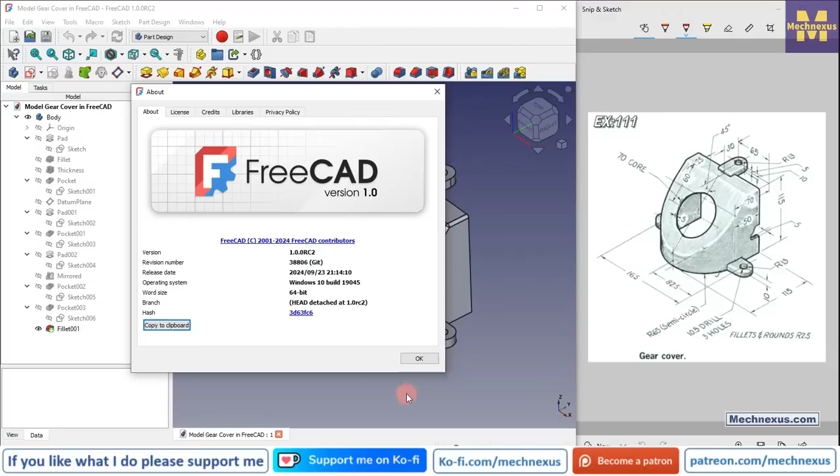I will close this file and create a new file. So here I have created a new file. First thing I will do is insert body, and I will turn on my origin plane, and we will read our drawing. If you see our drawing, we will create our first sketch on the right plane.

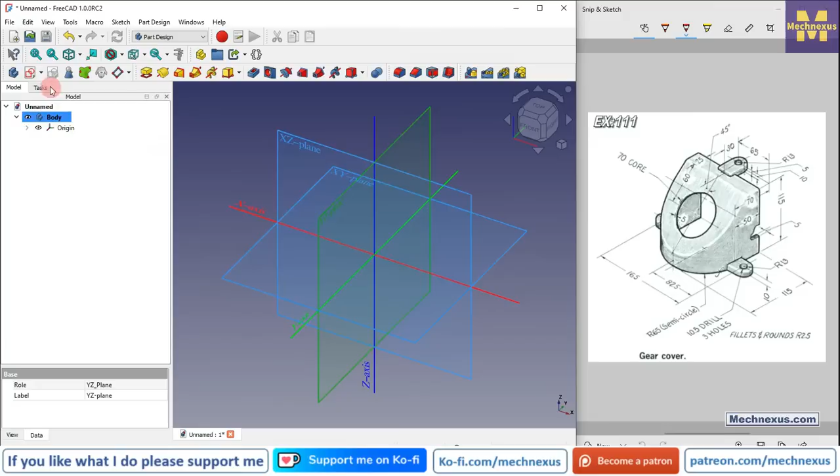So we will select this YZ plane and click on sketch, and we will go to the model tab and turn off the origin plane. Now we will select the polyline tool. Click on the polyline, and we will create a rough profile.

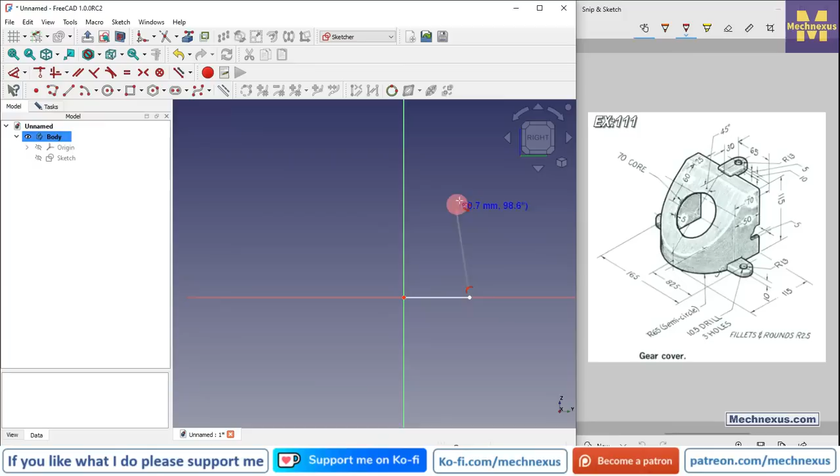So this is the rough profile. Let me move my icons so that I can get more space.

Now this is 115, so I will select this line, and in FreeCAD 1.0 all dimensions are combined in one. So here I want horizontal dimension, so I will give the horizontal dimension 115, and vertical dimension is also 115. You can directly click here so that FreeCAD automatically detects whether it is a vertical or horizontal dimension. So give it 115.

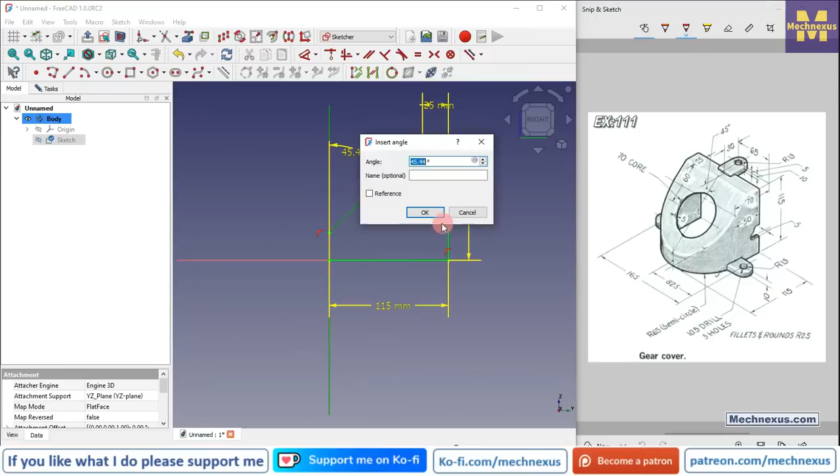And this one is of 25, and we will give this angle which is of 45.

Now here you can see that our sketch is fully constrained, so we will come out of the sketch, go to the task and close it.

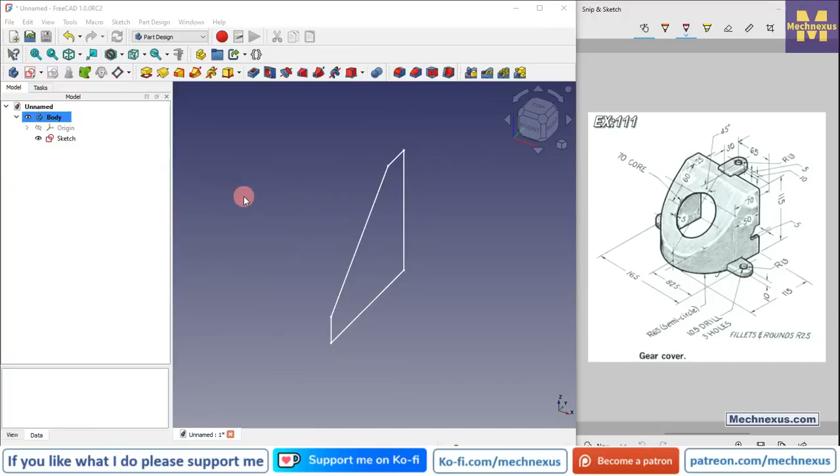Now the next feature is to extrude this profile. We will switch to isometric, select the sketch, click on extrude, and here we will give the value 130, and click on symmetric to the plane, click OK.

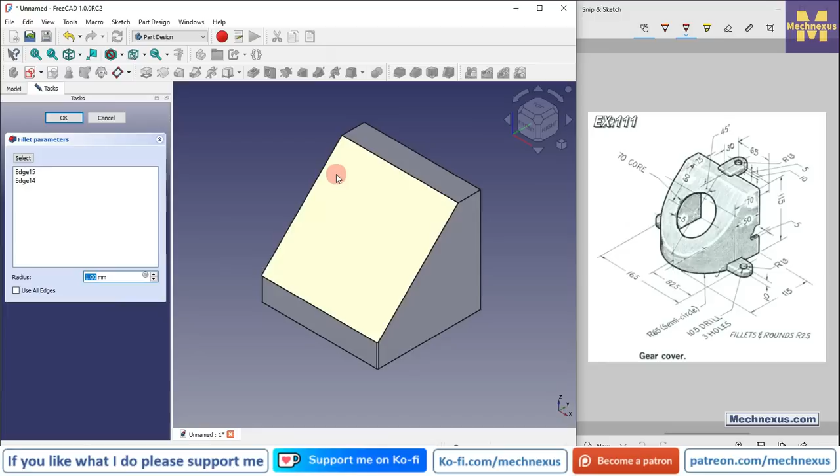And now here is a fillet, so we will give the fillet of 65. I will select these two edges by pressing the control key and click on fillet, and here is a fillet of 65, so we will give 64.99 and click OK.

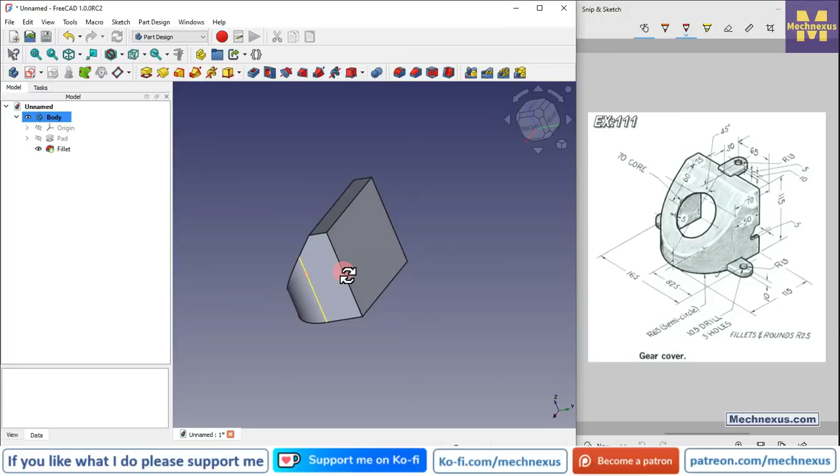And now we will rotate our model, and we will remove the material because this is hollow from the inside. So I will select this face and click on the shell tool, thickness, and here I will provide the thickness value of 5 mm.

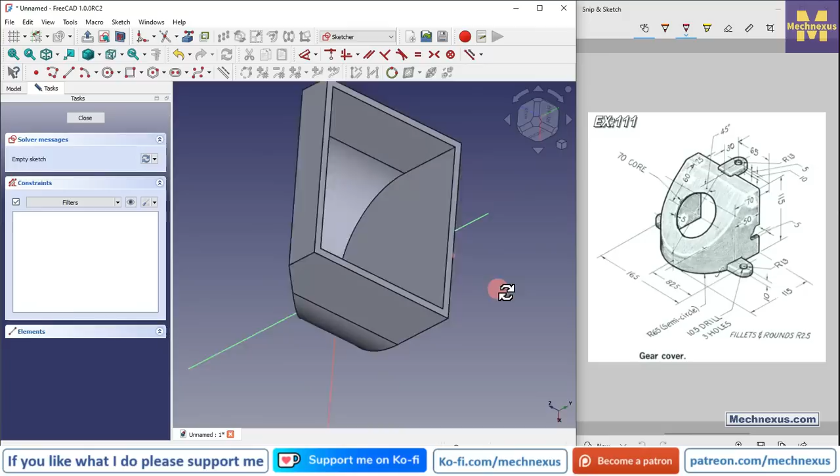And click OK. Bottom face, and we will project the geometry. Let's switch to flat lines, and now we have selected this outer face, so we will click on project geometry, select this edge, this edge, this edge, this edge and this edge.

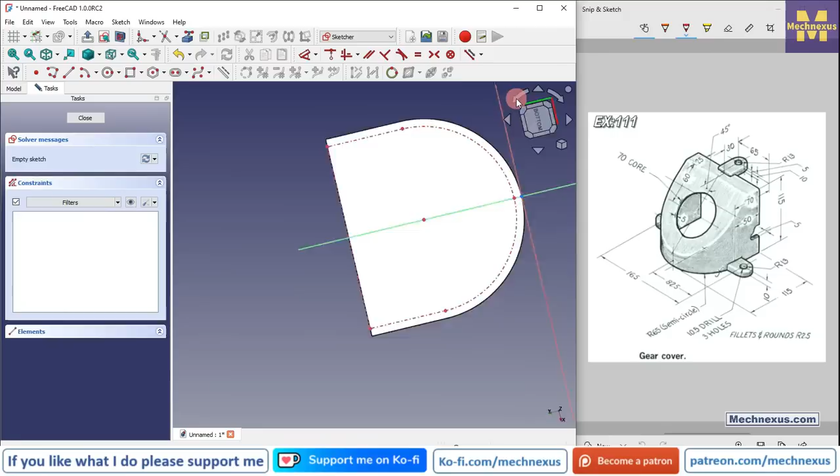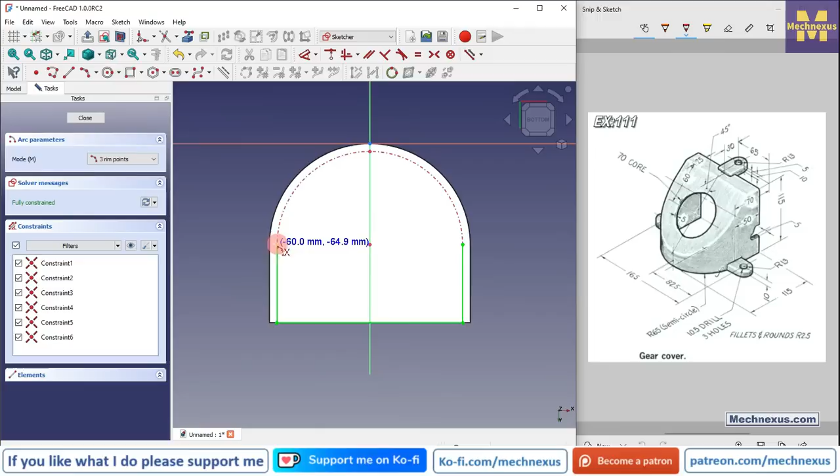Now we will create a profile equal to this. Select a 3-point arc, select this point and this one, click close, go with pocket, and select up to face, select this face and click OK.

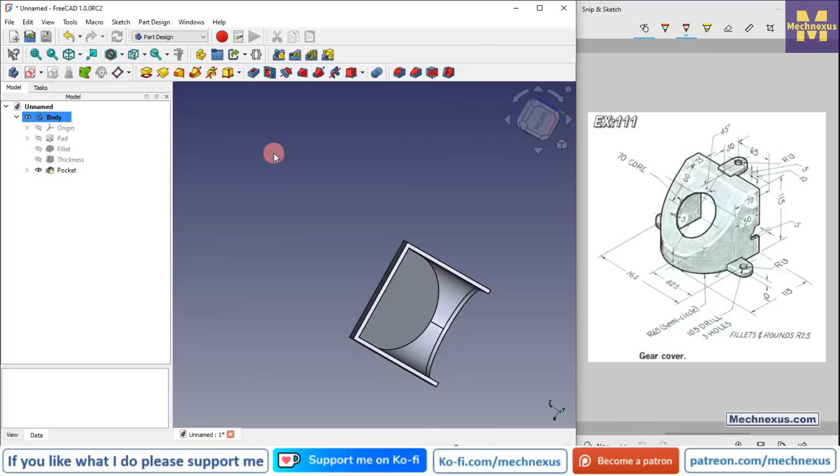So when I did this the first time, I was seeing some face here, which was a graphical issue. Now press 0 for isometric, and here we will create a datum plane at a distance of 5 mm.

So we will select this face and click on the datum plane, and in the Z direction we will provide the value of 5 mm. Click OK, and on this face we will create this tab.

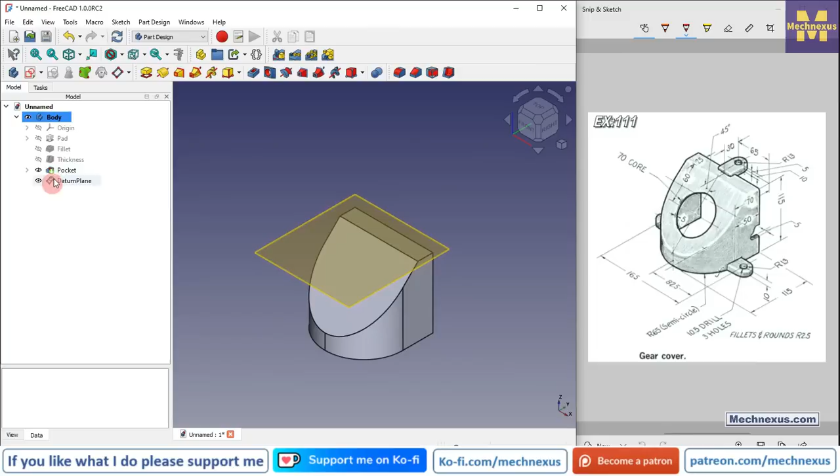Now here is a blue tick, so we will rebuild it and select this datum plane and click on sketch, and we will go to the model tab and hide the datum plane. Click on project geometry and project this edge.

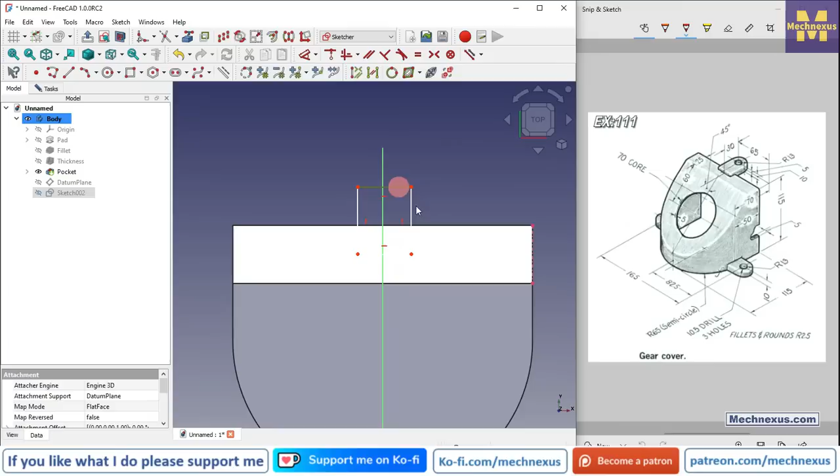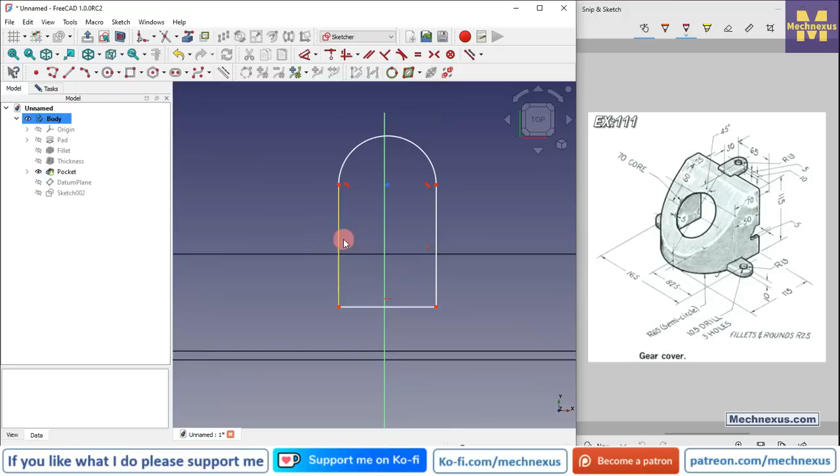Switch to flat lines, and here I will create a rectangle. We will delete this and select 3-point, and we will provide the tangency, tangent and tangent, and from here we will switch to wireframe, and we will make this symmetric.

So here is the symmetricity constraint. Select this point and this axis, and from this point to this center point we will provide the vertical dimension of 70 mm.

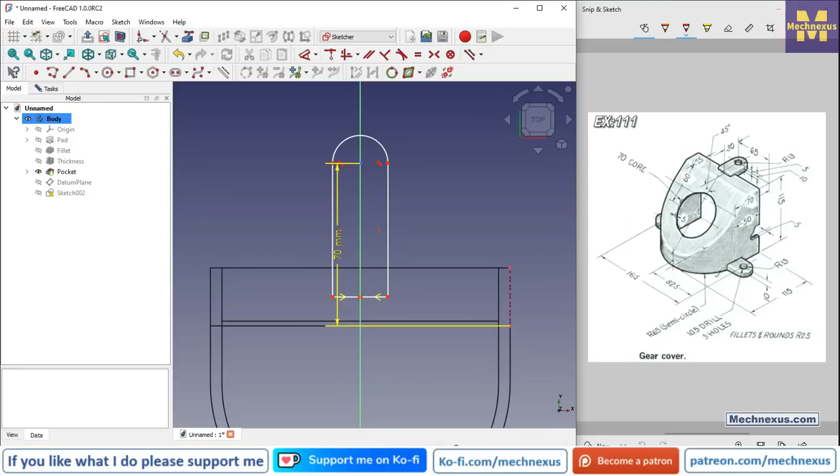We will move it, and this one is of 26, and this one is of 30. So here the dimension which is 70 I am given, it is not from here, it is from this edge.

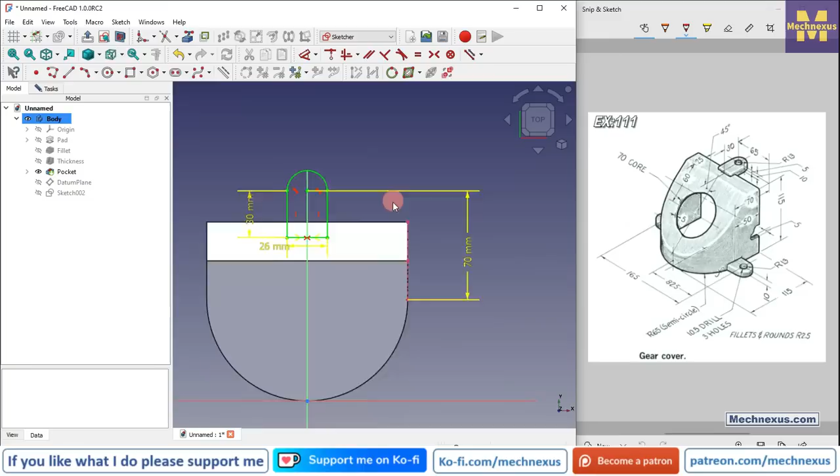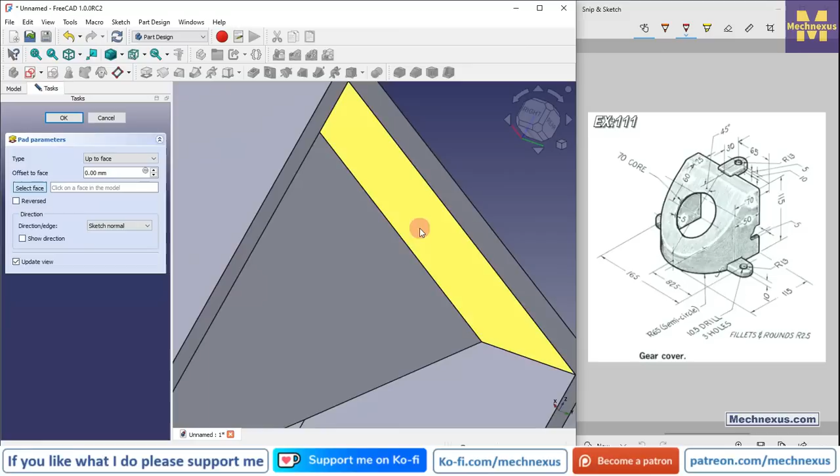So we will click on project geometry and project this edge, select this and this, and provide the vertical dimension of 70 mm. Now from here we will switch to the flat lines, and we will create this extrusion which will be up to face of this bottom one. I will come out of the sketch, select the sketch, click on extrude, and from here select up to face, and we will select this bottom face as our end condition. Click on OK, press 0.

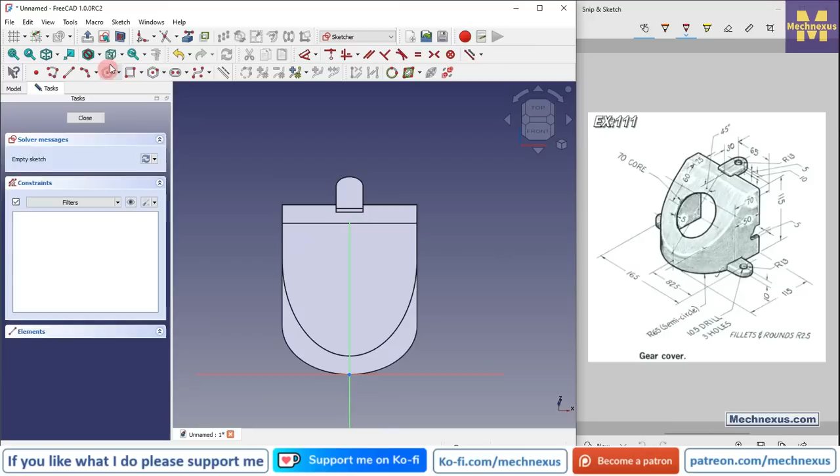Now here is a hole, so we will select this face and click on the sketch, and you can see that FreeCAD set this face normal. So we will click on this project geometry and project this edge, select the circle, and from here select this point and this point, and provide the vertical constraint.

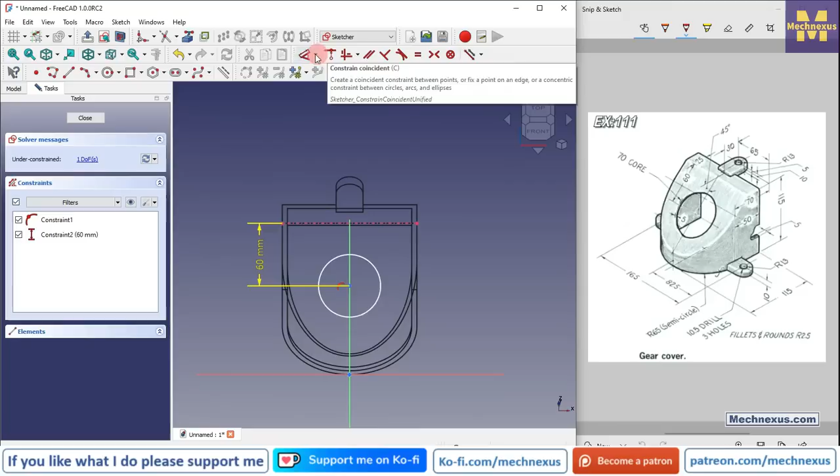Edit sketch. And this is of 60 mm, and diameter of 70. Click on close, and we will switch to the flat lines, and we will remove the material. Select the sketch, click on extrude cut, click on OK. We can also use the through all, no issue.

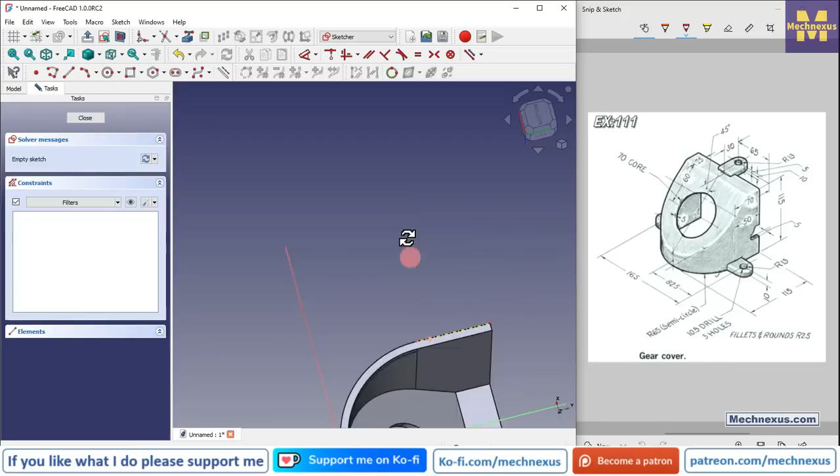And now we will create this tab here. So we will select this bottom face and click on the sketch, switch to the isometric, we will project this edge, click on project geometry, rotate our model, and now

Also click on project geometry and project this edge, and here we will select a 3-point arc, create an equal arc with respect to our projected arc. Now create a line, and this is horizontal, this is horizontal. Select a 3-point arc, select this and this, and set it tangent.

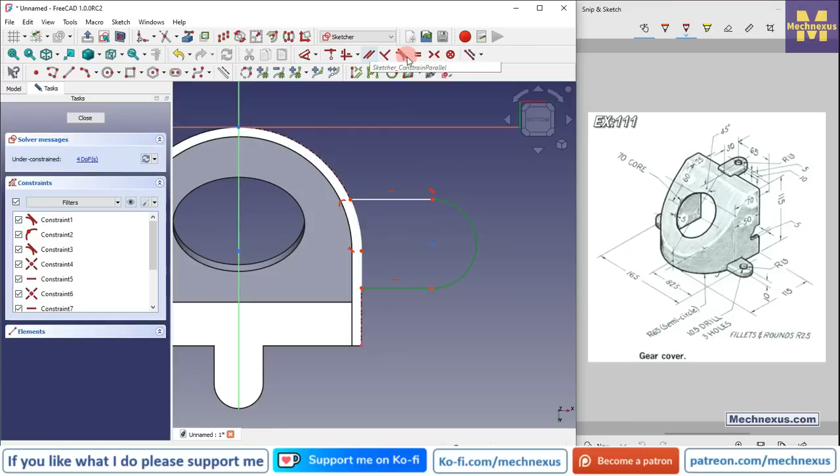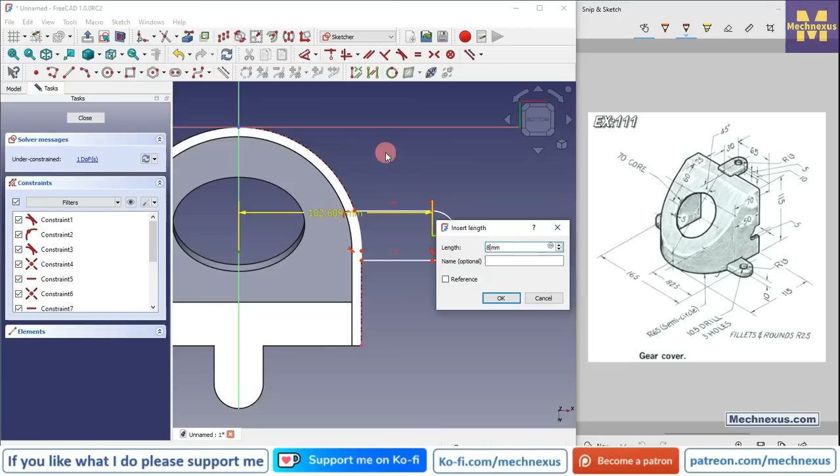Select this and this, set it tangent, and this is of diameter 26, so we will prefer to give the radius, which is of 13, and we will select horizontal dimension. Select this and this, and provide the dimension of 82.5. Now let's see what is the unconstrained.

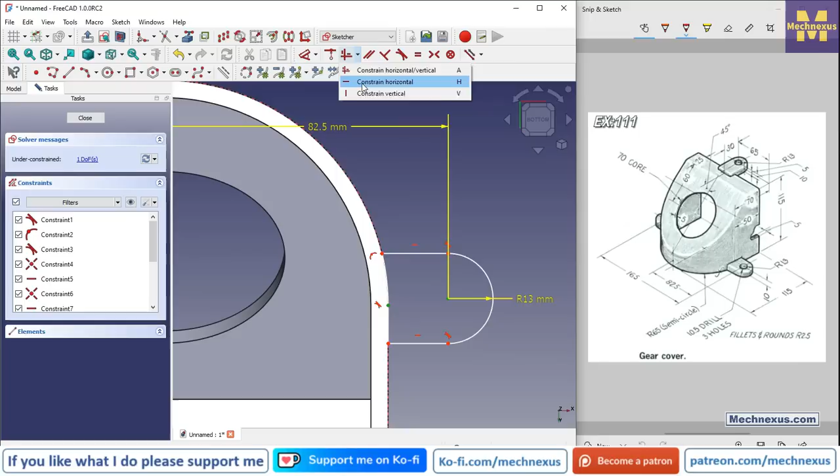So if you see that this is the under-constrained, because we will make this point and this point will have the horizontal relation. Click on close, and we will create a pad of 10 mm. We are not seeing anything here, so we will click on reverse and click on OK.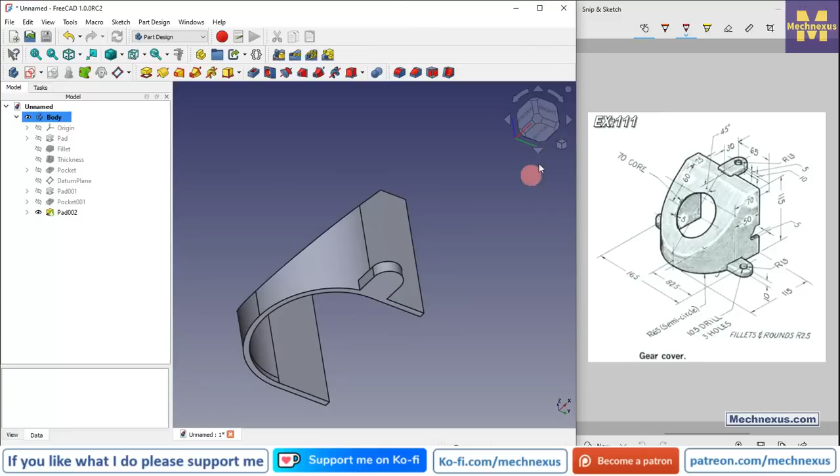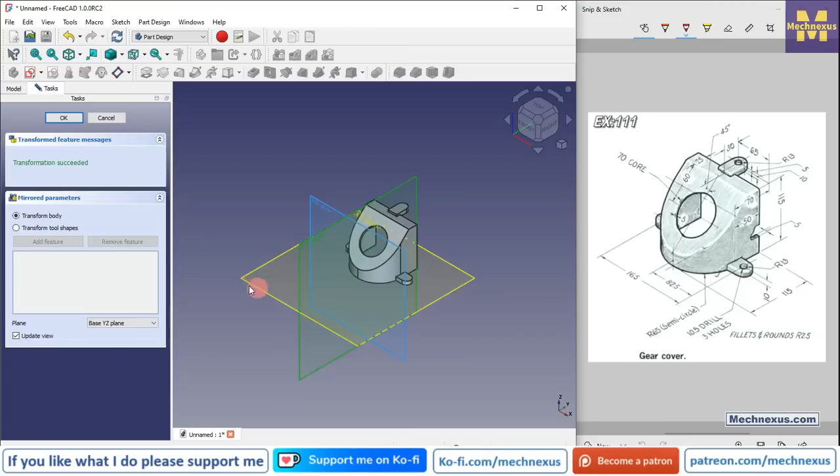And now we will mirror this on the other side, so we will select this pad and click on the mirror, and from here we will click option of select reference, and we will select this mid plane, and here click on transform body. You can see that our feature is got mirror. We will set OK.

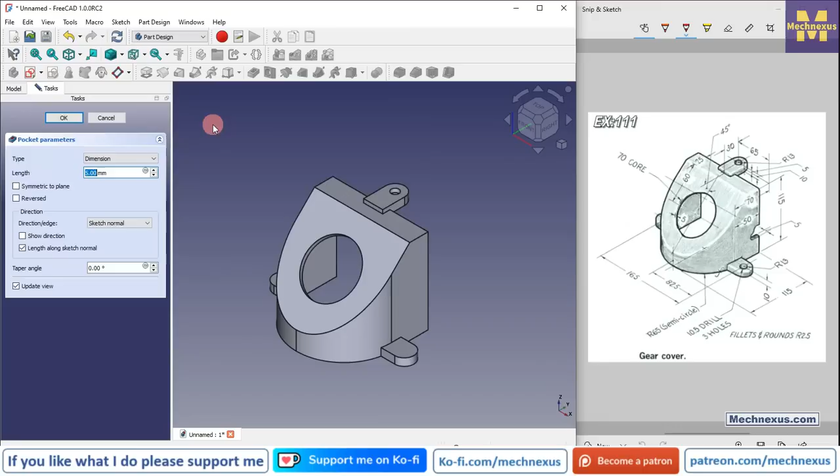Now press 0 for isometric view, and now we will create a hole of 10.5. Select the face, click on the sketch. So here is a 10.5 drill, so we will click on the project geometry. We can also make with a hole feature, but as it is a drill hole, so I will make with a material removal feature. Select smart dimension and provide it 10.5. Click on OK. Select the sketch, click on extrude cut, say it through all, say OK.

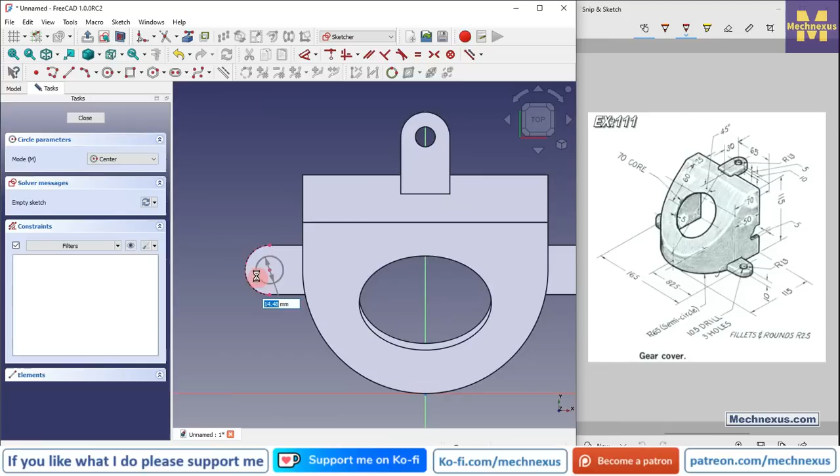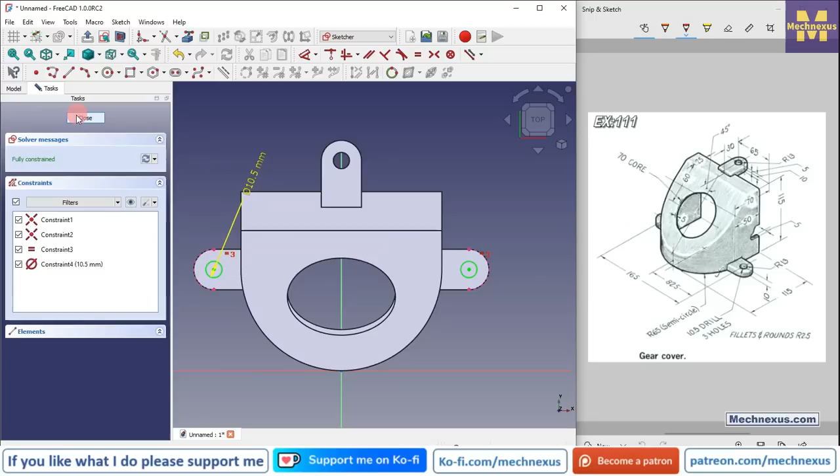Now select the face and click on the sketch. Click on project geometry and project these two arcs. Select circle. Now select this and make it equal. Select a smart dimension and give it 10.5. Click on close. Select the sketch, click on extrude cut, and from here say it through all, say OK.

And here is a common fillet of R3 which you can provide on this edge. So I will select this edge, this one, and this edge. Select fillet. It is a 2.5, but we will queue it around to 3. Let's see. Click on OK. You can provide the fillet to the inside like we have provided outside.

So this is all about this tutorial, how to model this gear cover in FreeCAD.